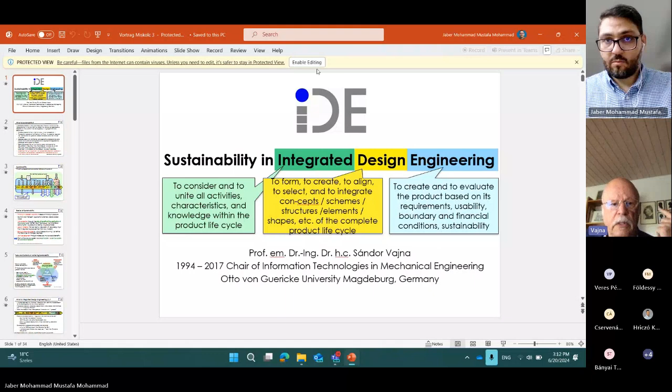Sustainability balances social, environmental, economic characteristics and their respective objectives. This is true for products and for processes, for which we have appropriate approaches, processes, and mainly supporting means.

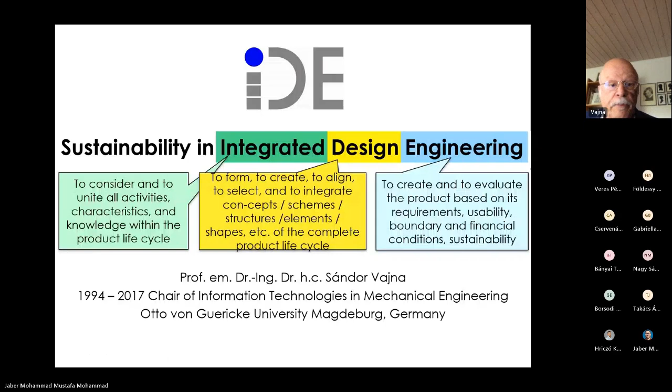Sustainability takes into account all environmental, social, economic requirements throughout, and this is the main difference, the whole life cycle of a product. It looks on technical, social, and economic requirements, where sustainability makes sure that within the product life cycle, all these influences are balanced out.

So, to put it together, to subsumize it, sustainability in integrated design engineering underlines the high responsibility of product development and the developer.

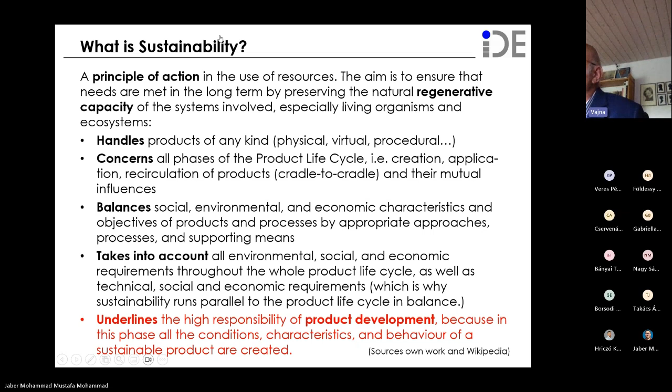Because in product development phases—Professor, sorry for the interruption, can you see my screen? I see the screen, how lovely. Is this the right slide or the previous one? Give me the previous one. Yes, this one then. Okay, we are in between this. Can I move it forward, or will you move it forward? I will be moving forward, but just tell me next and I will be clicking that. Lovely, no problem, congratulations, thank you. Congratulations that you made it work. Gentlemen, can you see the charts as well? Yes, good, yeah, good, lovely. And I see that I have to look on this because my camera, usually this morning it worked very nicely, and now it does not work. Now you see my face. You are happy not to see my shoes, but that's okay.

Right, so we arrived at this chart. Here we are.

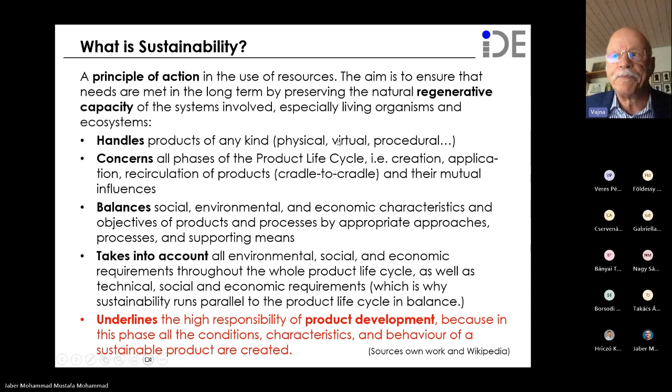So come on, here we go.

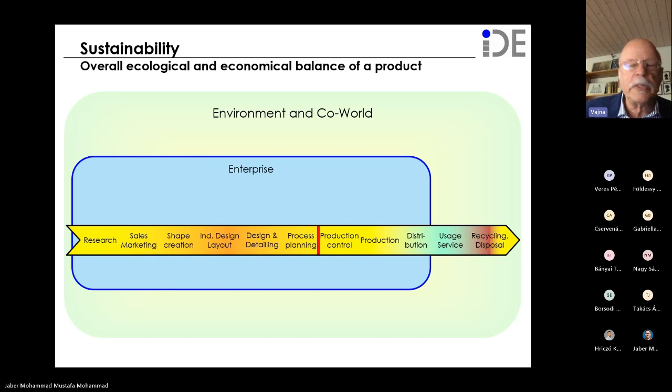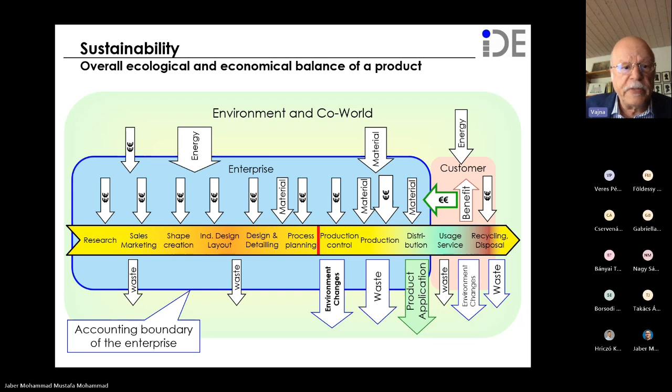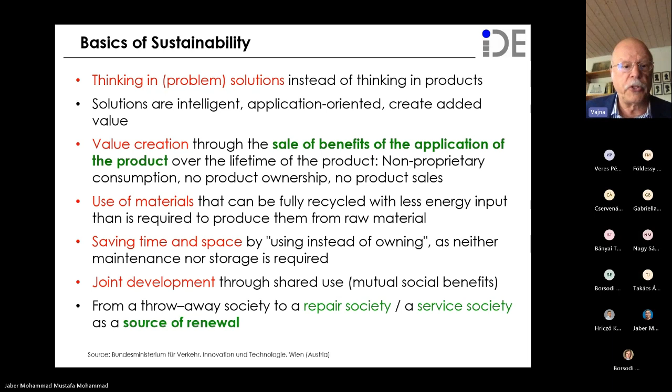That was too fast. So, sorry, this is a professor talking to you. We need some basics—please excuse me or do something else.

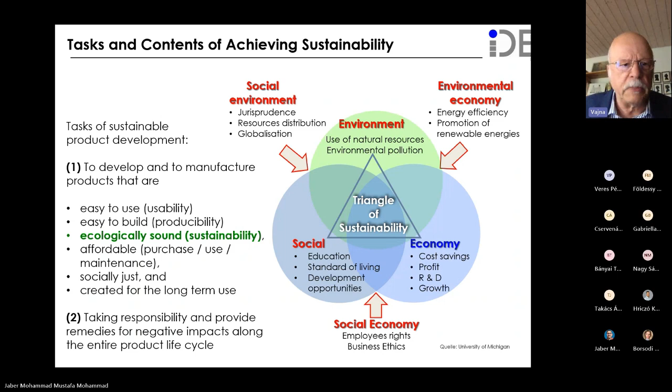Definition—we can't live without definition. So what is integrated design engineering, which houses sustainability? It's a human-centered approach, this is the main important point, and it is organized in a certain way.

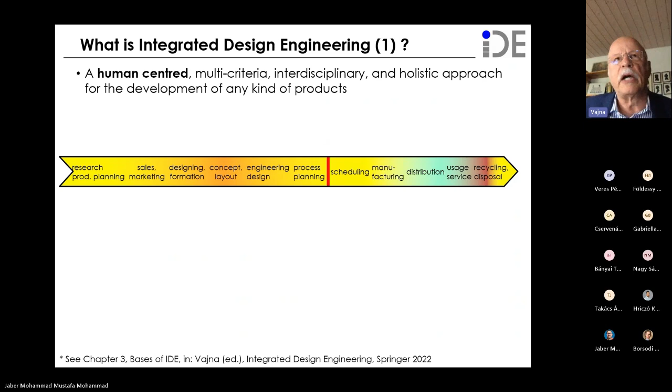The point is, below the arrow to the right, that we do not describe products directly by size, weight, and dimensions. We describe products by 11 equal but not identical attributes, which focus on the components and parameters you would like to have from the product.

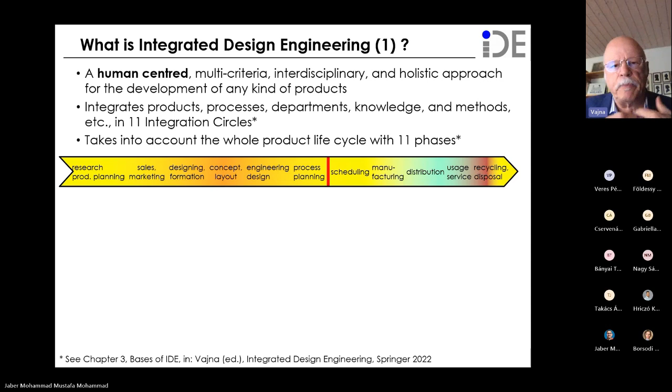A parameter is, for example, I must be able to handle it. It must be a not too heavy product. It must be good looking. So we describe the product exactly from the point of view of the later user, not from the point of view of the company that makes it. This allows us to put much more capability into the product than with standard product development.

So development processes and projects are handled using an approach of trial and error. As we are in academia, ladies and gentlemen, we call it test, operate, test, exit. We do something, see whether it fits or not—if yes, go further, if not, retry. We live in a dynamic and flexible environment, the same as in real life. This is a quite sophisticated, not simple, but very well working approach.

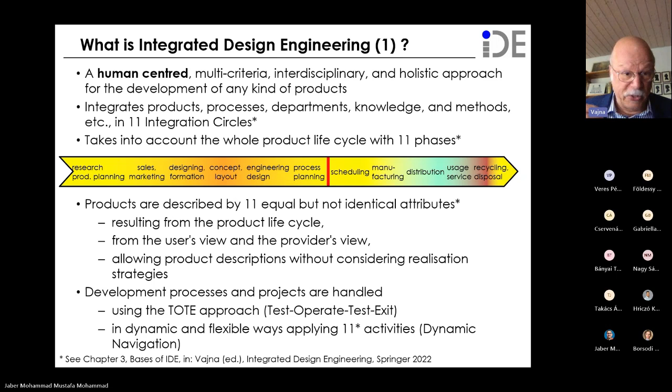So that's why it's possible to create products which are multidisciplinary, applicable. These people who work together have common cultures of communication and working, so they can treat and act in an integrated and holistic manner, and have interdisciplinary knowledge.

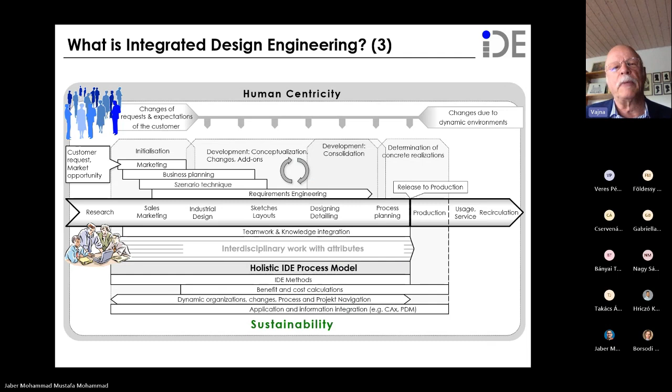May I open a parenthesis and put in my very personal opinion: to my mind, it was not the right decision to close down atomic power plants. One should have kept them and increased their safety, because this is the only way we can get energy without ruining the resources of the world. Finish parenthesis, finish with the private opinion.

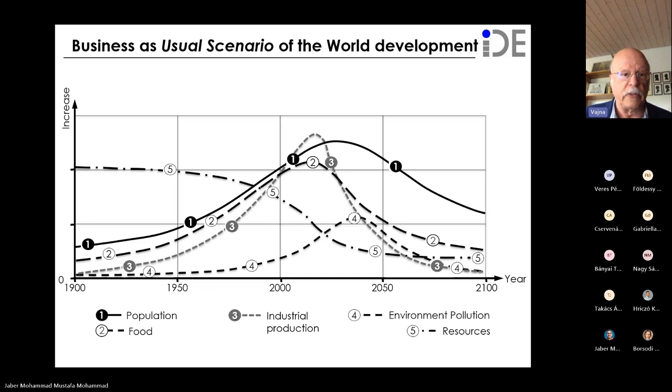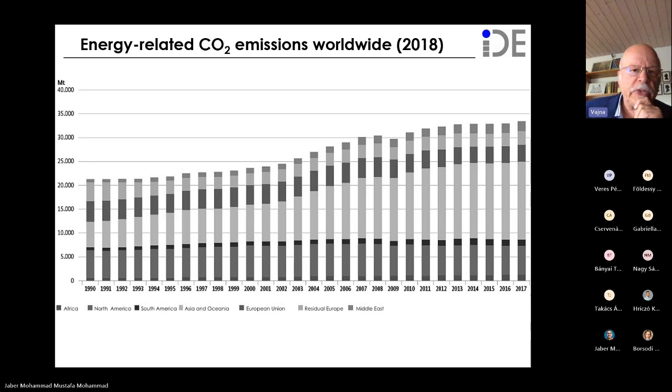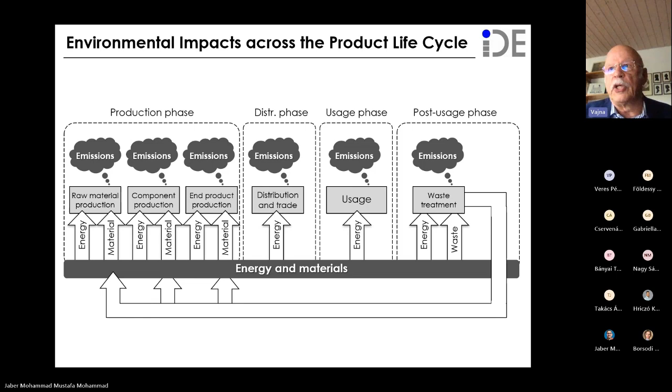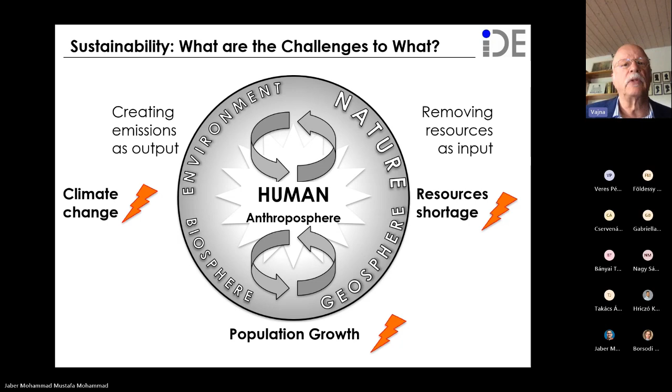So what are the challenges for creating sustainability? We have to look at two circles: the human situation, and the world in which the human lives - the anthroposphere. There are some keywords here: on one hand climate change, on the other hand resource shortage, and the growth of population. If we continue to grow this way, in about 70 years we will have to look for a second world where all these people can go, which would otherwise destroy the world for others.

Nevertheless, a lot of work has been done on sustainability rules and knowledge bases. I don't want to go into detail with all these abbreviations, but for example, on the top right side, the post-growth economy and the sustainable development discourse are real good possibilities to curb the increase of waste which we actually have now.

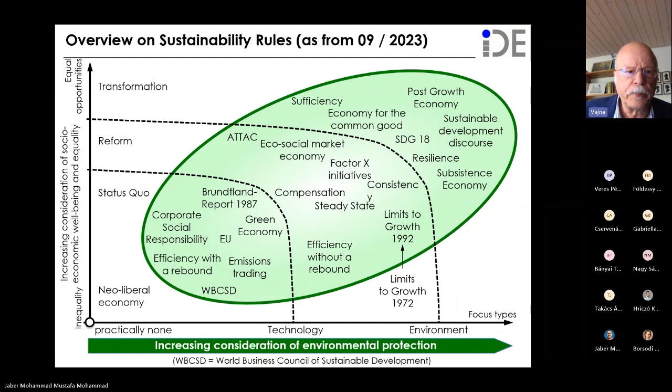However, we have to take in mind the cost development curves, and as this picture was made somewhere in 2003, what we can see is that the renewable energies costs will decrease as the technology which we have for that increases. But the cost for fossil and nuclear energy will heavily increase, and that's why we have to go down.

We have now 2024. We have to swap as fast and as much as possible to renewable energies. This is the nice curve. We have to do it. And everybody starts to change the world with his own work.

So do we always have to drive with a car? I can tell you, if you only drive the car, your medical costs will increase when you get older. Do we have to fly for nothing from A to B? You can get the same thing both in Budapest and in Miskolc, so there is no need to go to Budapest, and so on.

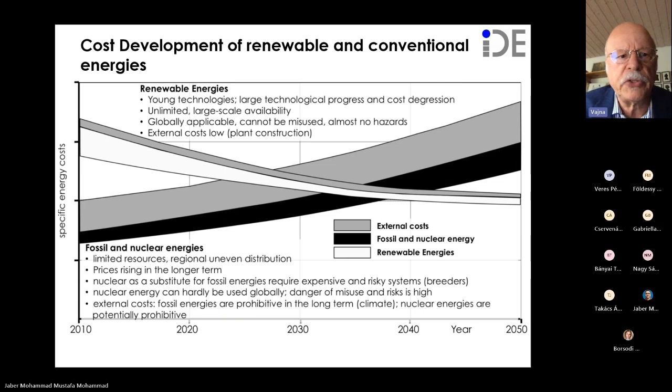One main role of the carbon balance which we have to achieve is the role of soil, where we could store the carbon inside in order to provide it as nourishment for new plants and everything which can grow.

So the point is better not to create as much carbon as we do now, but to avoid having to put it away. The only thing which we can do, if you have a borehole or where you get coal out, is press it into the soil. This is at least for the next 5,000 years a possible storage area. However, we have to rethink it when we open these places after 5,000 years.

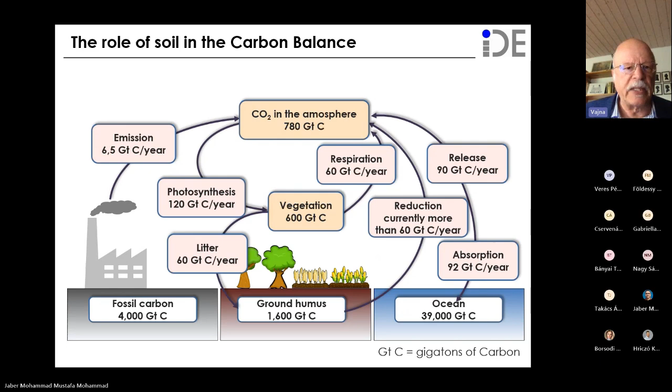Why is this critical? Because we have to keep in mind that the planet can end. We have so-called guardrails, which tell us that we can't overuse the world. We can overuse it exactly one time, and if we then try to overuse it again, the world will collapse. So this is not the point in which we shall arrive.

We have to keep all these guardrails, like climate change, stratospheric ozone depletion, aerosols in the atmosphere, the acidification of oceans and the increase of their temperature, and the enormous use of fresh water. By the way, if you buy a new car, have you an idea how much water you need to manufacture this car? It's more than 1,000 liters.

So a ton of water is needed to create a car. And the question is, is this necessary? And the answer is, if we would research, we would find no. If we would pay a little bit more for the car, we would find that we can save a lot of money. So everything is somehow interlinked. These are the systems where the guardrails are for the world, and we can't cross them. We have to keep them in mind when we do things.

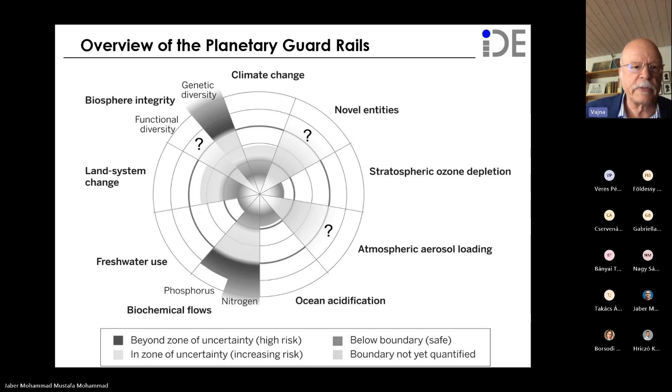Of course, there have been some political issues, some points to do, selected events, started more than 50 years ago. And it's still not ended. The latest conference was the 2017 IPCC special report on the objectives to reach a goal of 1.5 degrees climate temperature growth during the next years.

But you know conferences. Everybody is driven by the conference feeling, and everybody promises a lot of things, but when you go home, you find out that the bigger part of your promises... see? So we have to work not at congresses, we have to work day by day to get rid of these problems.

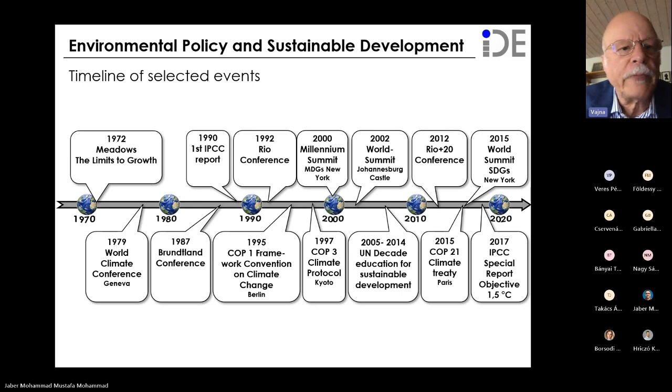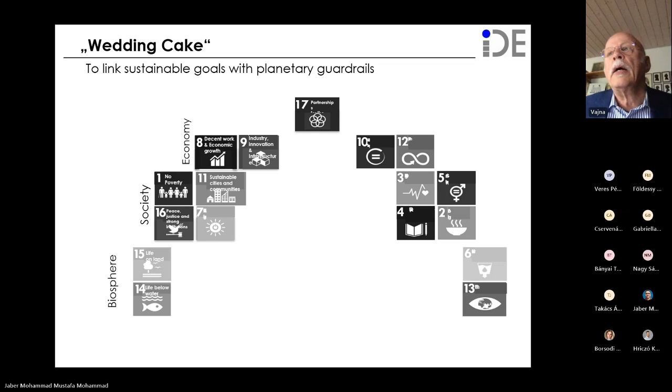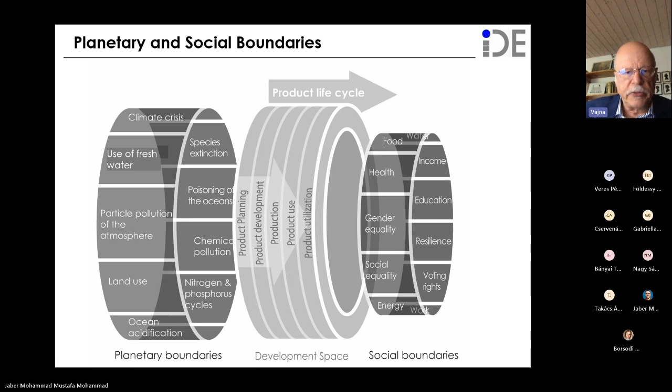And of course, by this way, we can open up a philosophical discussion. Why shall the people in other countries like Africa or parts of Asia be punished that we, Europeans and Americans, use the world so much, and they want to do it as well? But if everybody in the world lives the same way as Europeans and especially Americans do, then we can close the world down. Perhaps not our generation, but the next one for sure. So see the problem, and that's why we have to save first, and we have to make it sustainable.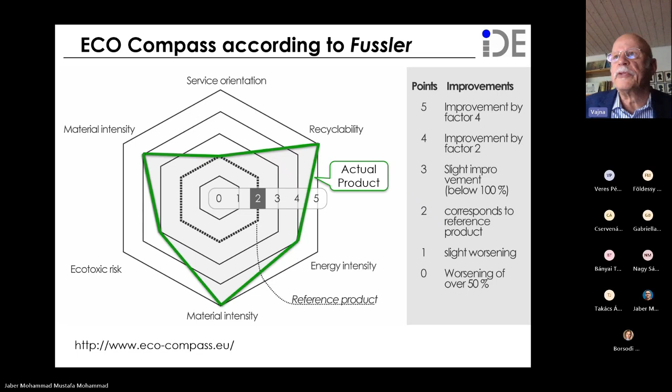And now, given some hints for doing the right things at the right time, it is to make some kind of methods and sequences of a form of sustainable development. So what one can do, there are checklists, there are matrices, there are analysis methods, there are low carbon analysis, and so on. Look it up. It helps you a lot to create new products, new services, new activities in a way that it is economically responsible and sustainable.

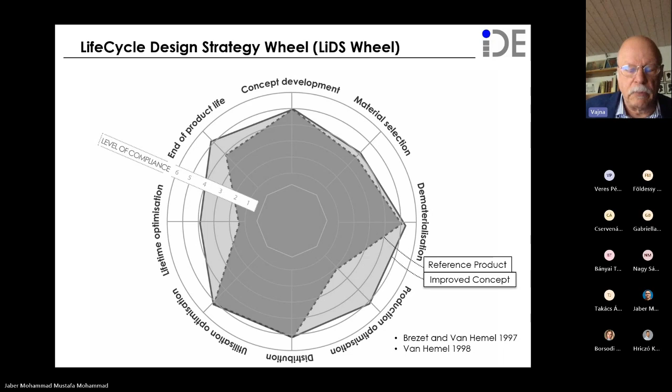So this is more or less a possibility to show what can be done and show better what should be avoided. So now if you want to avoid something, we have to find out the factors which influence sustainable consumption.

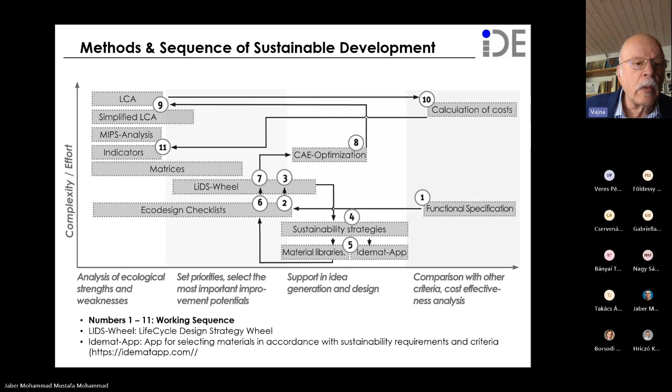Now, sorry, this is a typical professor's chart. Not readable, needs to be explained, and all the students would love it. I don't want to go too much into it.

If you see down in the middle, sufficiency goes to the right. So if the situation is that I use too much money, I use too much resources of the world, what I have to achieve, what is my goal, is what is called on the right-hand side: sufficiency and collaborative consumption. We are individualists, ladies and gentlemen, and the question is, if you're an individualist, everybody wants to have a car, even if only 5 persons need one car, where they have to agree upon how they will use this car. And the same is good for forks and knives, not for boots obviously, but think about using with others, collaborative consumption, and so on.

What we can do is not focus on the left-hand side, disposal. We have to look at the right-hand side, and there is one word called rental trade. We do not buy an object which we use, we buy the usage of an object.

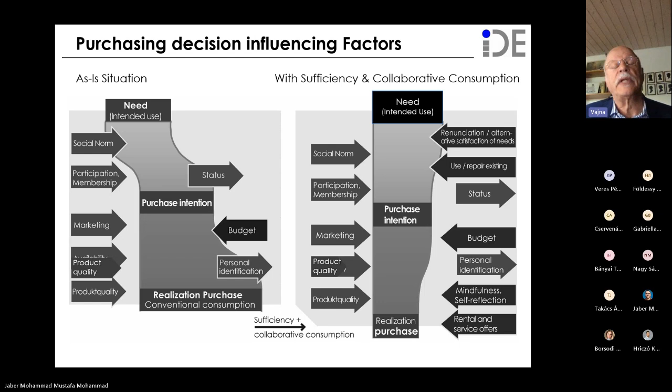It's like car sharing, but you can talk about TV sharing, house sharing, whatever you want. The number of objects of which the need is 2 or 3 times realized, so we only need half or a third of these objects, we can avoid through rental trade with specialized companies who rent me certain things. Could be housing, could be not toothbrushes, that's for sure, but we could do everything else that allows us to create a closed loop of recycling and reuse of products we used before.

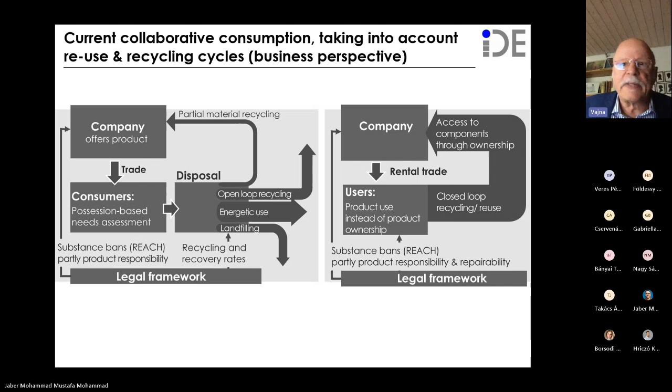So let's come closer to the end of my presentation. I have 3 minutes, there are 5 theorems. One thing is interdisciplinary cooperation, networked thinking, and looking at problems and systems in a global context.

Second, there is no general concept to solve the problem. It is always dependent on the actual situation. However, if we keep in mind the guidelines and so forth, then we can arrive at a solution which fits my problems, perhaps your problems, but not the problems of Esztergom or Debrecen or Budapest.

Theorem 3: nothing is true from the beginning, so we have to question everything. We have to use humility and not cockiness. We don't know better. Even an engineer has to accept that he or she does not know better. We have to look and take our consequences.

We are maybe the crown of creation, but unfortunately we are as well a part of nature. And if nature is not good enough, can't support us, do we want that? No, right.

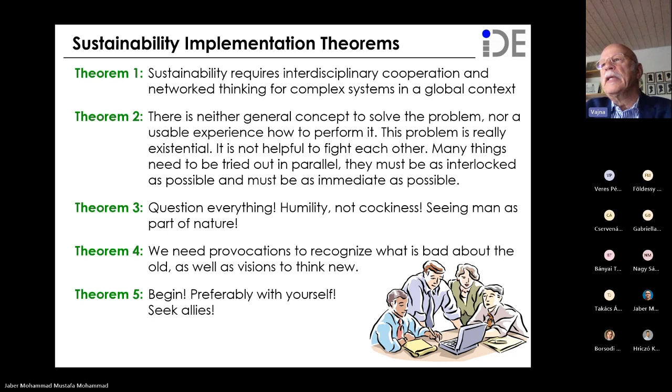So action and means is the chart to keep in memory, I won't read it to you now. These are what you heard so far, in this summary, and if it can help you, the better. If not, and you have questions, you will get my address from Professor Vajna, and she knows everything I was discussing here, she knows it very well too.

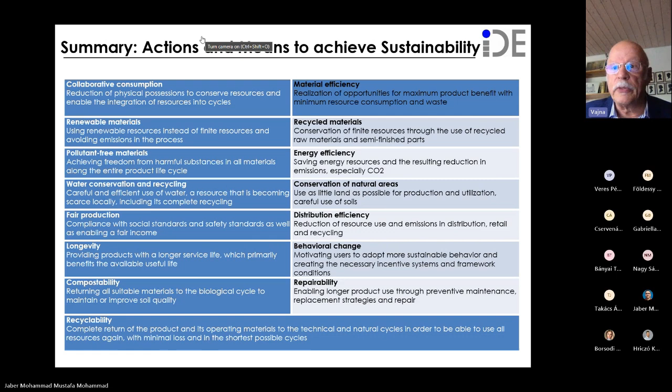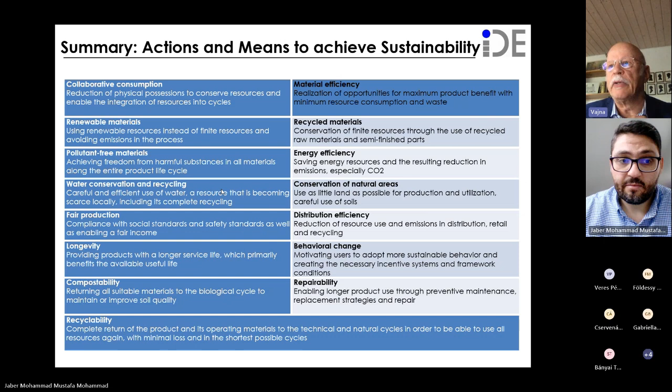Can you put in chart number 7? What is in, yes, which slide? The slide is named "What is Integrated Design Engineering? (2)" That is this guy making this one, and on top is human centricity. Yeah, okay, number 2, right. Put it up on screen if you can. Yeah, look, I think it's up now, you can see it. Can the audience see it? Yes, yes, okay, great.

So this slide is a little bit upside down, but let's have a look on the bottom. There you see a product life cycle in a flat format, otherwise you would have a big circle and you wouldn't understand it. It creates the product model using a specific way of describing it. This is the attributes, which I don't want to go into detail about, but attributes describe the expected or wished behavior of a product. It doesn't say how big, how heavy, how many components. It just says what kind of behavior the product shall have, and this is described by attributes.

For those who can read, give me a minute. The way we're doing this is described in this book, available by Springer. It costs about 5 cups of coffee in the most expensive Budapest coffee house. This is Integrated Design Engineering, in English, and it covers the latest results of this research work. So let's go back to this image.

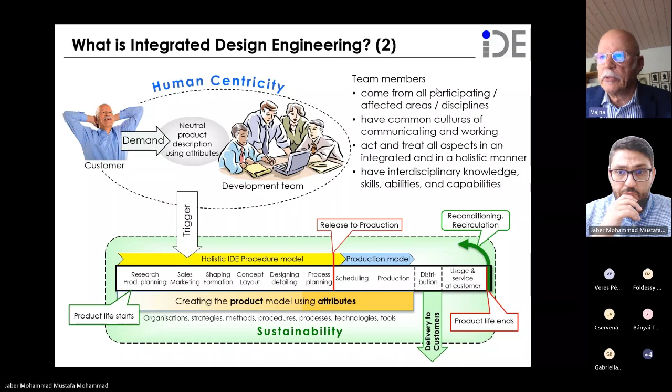Is this okay as an answer? Thank you very much. Yes, thank you. My pleasure. Maybe the next question. I was really interested in the content of the presentation.

As you know, since the 70s or maybe before, the 60s, they were talking about limits to growth and the boundaries of the earth and natural resources. Some may argue that we've been living for hundreds of years, the climate is always changing, and there's no necessity to take any further steps. How can you argue with such mentality?

And the second question: we have this wedding cake diagram that you were describing, and it's really interesting to view the sustainable development goals in that way. There are some voices saying we will not be able to achieve those sustainable development goals. If we can't, what are the alternatives then?